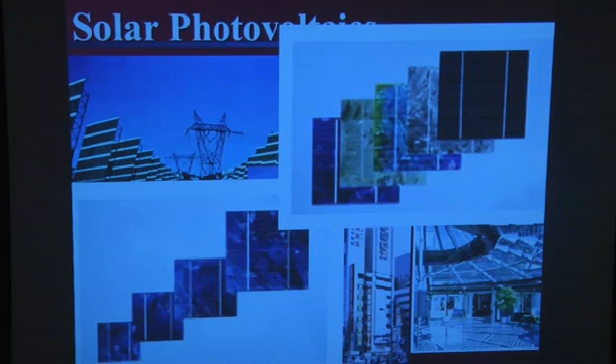but when these architects got involved, then the companies started producing kinds of cells and kinds of panels that could be integrated in buildings in ways that they looked attractive also, which increased the market, and therefore a lot more companies got involved in it. And finally, when Europeans got more involved, especially Germany, by way of feed-in tariff, that increased the market so much that the photovoltaic manufacturing and photovoltaic deployment increased tremendously.

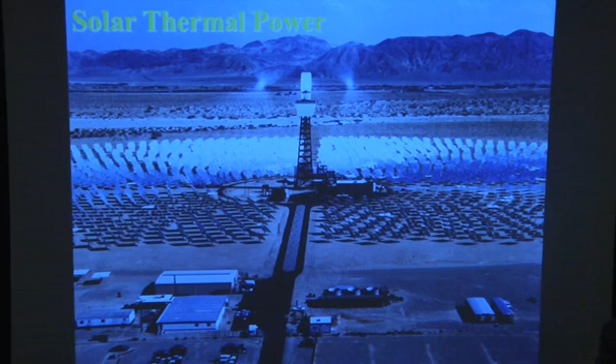Now, that's not the only way we can convert sunlight to electricity. We have another way, which is indirect conversion. That is, you convert sunlight to heat and then heat to power, like in any thermal power plant. So I'm just showing a couple of examples here. This is one which is called the central receiver or power tower type of concept, where reflectors reflect onto a central receiver and you can produce very high temperatures.

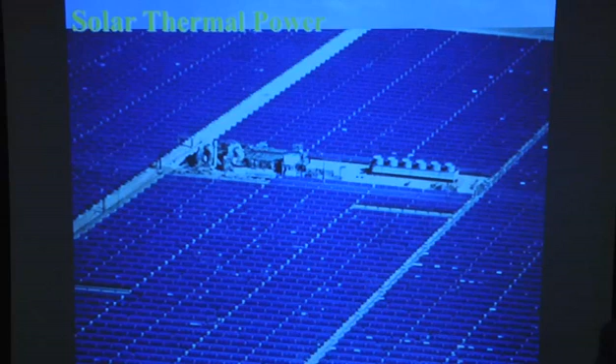Here's another example which has long rows of parabolic troughs, and again you concentrate sunlight on the focal line of the parabolic trough, and you heat a fluid, and then you go through the normal thermal power cycle. Or you can have parabolic dishes. So any of these methods of concentration can be used to convert sunlight to heat at a high temperature, and then go through your thermodynamic power cycles.

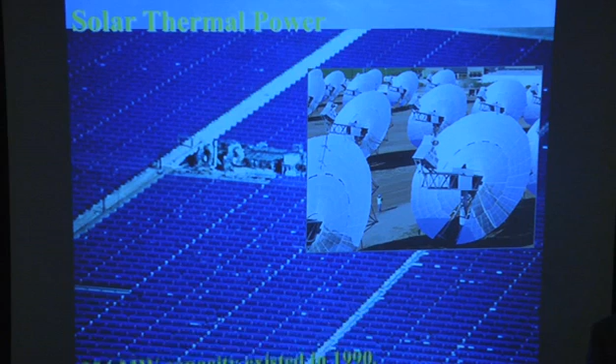As early as 1990, 354 megawatt of this capacity existed in California. By the way, that plant, which was built in stages, and I think the last stage was finished in 1989 or 1990, is still operating. The owner of that plant right now is Florida Power and Light. They happened to buy it, and so they learned from it, and based on that, they built another plant in Florida, and now they're building in Spain and other parts of the world.

However, at that point, the development stopped. If we have time later on, I'll tell you why it stopped, but most recently, there's a resurgence of interest in this technology in Spain, US, India, China, and more than 3,000 megawatts is under construction right now at this point. The main interest comes from electrical utilities, which are interested in large-scale central power plants.

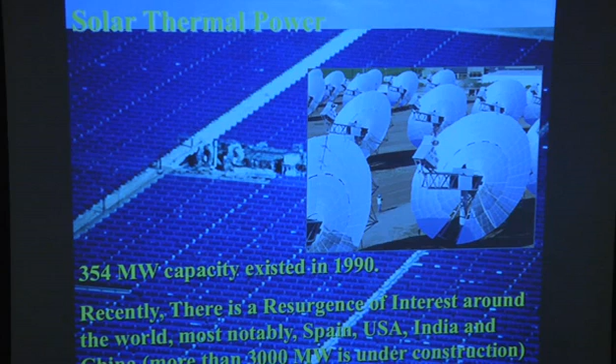And because this is where you can integrate solar power with backup fuels, you can include thermal storage, and that makes it possible for them to have power whenever they need it, so they have more interest in this technology.

Now, photovoltaic costs, in the 70s, it was about $100 a watt. Then came down to about $30 a watt. In 2003, it was down to $3 a watt. I remember that I attended a conference in the late 70s where somebody said that one day photovoltaic panels will cost $1 a watt, and everybody in the audience laughed at that.

But that actually came true in 2010, and right now the cost is less than $1 a watt. In fact, a company that I advise got a bid from a German company at 65 cents a watt, panels delivered to the site where they are going to install those panels. However, these are just the panel costs. The balance of the system adds another couple of dollars to it.

So in these technologies, we're moving in the right direction. The efficiencies are going up, the costs are coming down. However, in photovoltaics, based on the current concepts, we're reaching the limits of cost reduction.

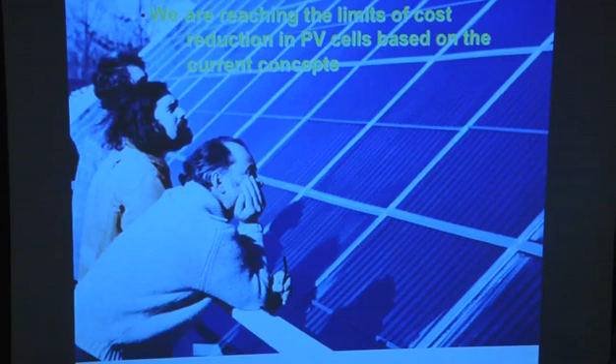Although there are many areas of research, people are looking into materials that are not rare, people are looking into materials that are not toxic, so that solar cells can be made in a sustainable way for a long period of time. But in terms of cost, there's not a whole lot more. There will be some reductions, but not a whole lot. There will be reductions, though, in the balance of the system.

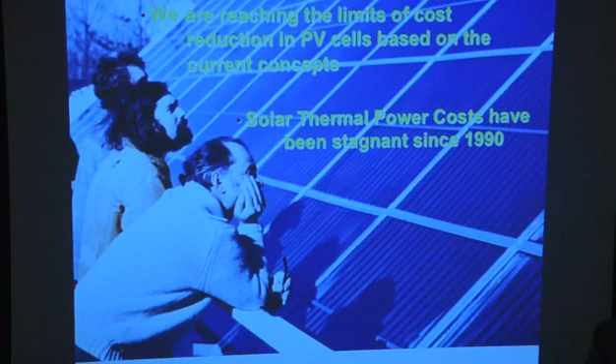Solar thermal power costs have remained pretty much stagnant since 1990. At that time, I heard the cost projection of about $3,500 a kilowatt. Today also, we hear the same cost. And energy storage is sort of missing in all of these cost calculations.

So with this in the background, I thought that I would tell you some new and exciting concepts and developments based on innovations and scientific R&D. Now, they cover a vast area. It's because I picked those three where our group has been working in some way. But at the same time, as I said, at the end of it, if you want to focus on one of them or on something entirely different, we'll be happy to discuss.

So these are examples that I will talk about very briefly. Now, I do want to say that I'm not going to go deep into any of those in my presentation. The reason is that in some of those, a few of you may already be working in it, and you may know a lot, but there are others who may not know anything about it. So I've kept it at a level where people who don't have that background can still understand it.

So first, beyond photovoltaics, new concepts in direct energy conversion. Then new concepts in solar thermal power. And finally, I thought I'd put one in environmental application of solar energy, which is photocatalytic oxidation for disinfection and environmental cleanup.

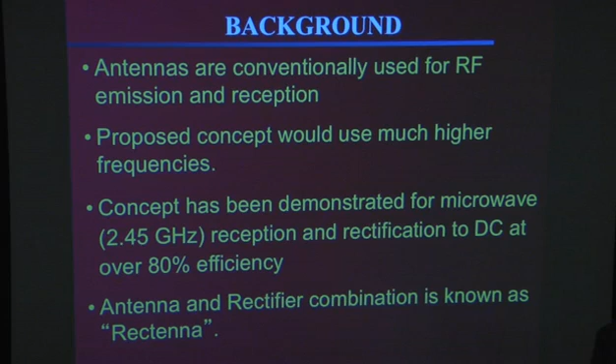So here's the problem: FM broadcast wavelength is in meters. Therefore, your antenna size is in meters. And for UV-visible, the wavelength is in microns, nanoscale or microscale. So your antenna size has to be that small. And in fact, the rectifier size becomes even smaller. And so that's where the holdup is.

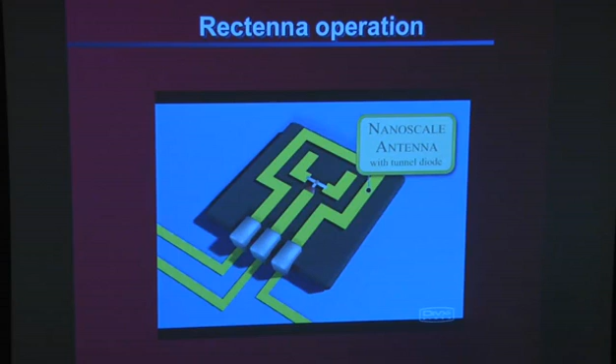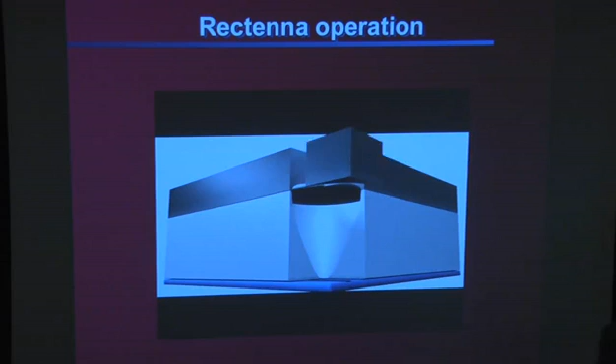Okay. So here is a concept that we are following, where we would absorb sunlight and re-emit it in the infrared. And that would use plasmonic emitters. So here you would have the plasmonic emitters, because then we can see what frequency or what wavelength we need. So we have emission, and we have the antenna and diode designed for that frequency.

So with that concept, if we can convert far infrared to electricity, and we can show that this concept works, then we can continue to work at higher and higher frequencies. So that's the whole idea.

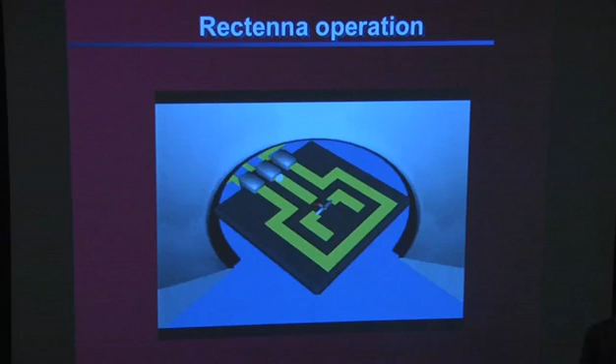Now, as far as making antennas of that size, as I told you, with nanotechnologies it's not a big problem. In fact, a group at Idaho National Engineering Lab and a company they were working with in Boston did a press conference where they showed a flexible substrate on which they had printed millions of these antennas. But they also agreed with me when I called them that the problem is really not the antenna, the problem is the diode, because each antenna has to be integrated with a diode.

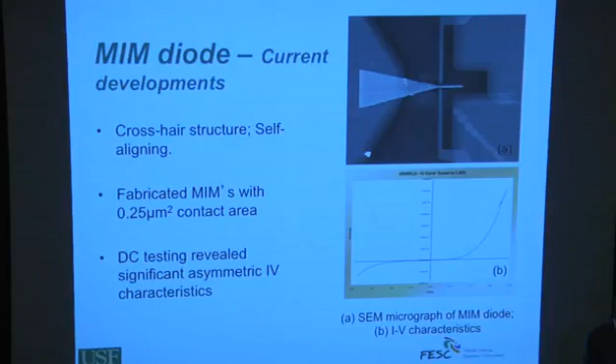So the diode concepts that work at lower frequencies would not work at frequencies that high. So you have to go to other concepts. We started looking into MIM diodes and found some success, although the characteristics are asymmetric, but it's not that good a rectification. Then we started looking into polymer-based rectification, where we can use self-assembled monolayers for the insulator layer of MIM diodes. And we found a peak rectification ratio of 150 to 200. So that gives us some hope that we are moving in the right direction. Okay.

Ultimately, though, what I foresee is that you will have biological antennas and biological diodes. Okay. The advantage in this concept, although it still needs to be shown that we have converted at a certain efficiency from infrared or from visible light, even though it's been shown in the radio frequency range, is that the biological would be based on work that has already gone on in terms of single-cell algae that people are working on. Eventually, that's where the development will go.

So if you can do that, then you could do ambient radiation. In other words, it will not be just the visible light during the daytime, but radiation at any other time also that could be converted, and you could then start foreseeing buildings covered with these biologically grown antennas that are converting ambient radiation to electricity at all times. Okay. So that's one of the concepts.

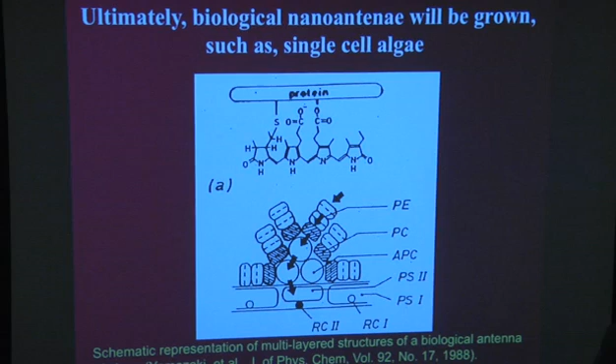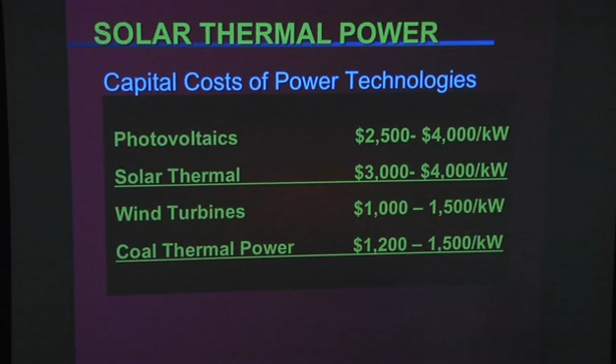Now, another thing I said was solar thermal power. And here's the problem with solar thermal power: when you look at the costs, solar thermal power costs are more than 2 times the cost for coal power, and coal is the biggest source for generating power in the world right now. Okay. We can talk all about environmental benefits, why solar power should be preferred even though it's more expensive, but we also know that in practice that will not happen. So we will have to reduce the capital costs of solar thermal power by at least 50%.

And so the question is, what do we expect to see in the future, or what should we do that will reduce these costs? I co-founded a small startup company, and they're building a demonstration 1 megawatt power plant where they have shown that they can already reduce the cost from $3,000 a kilowatt to $2,000 a kilowatt. But that's not enough. We need to reduce it even more.

So there I see the future developments that we need to work on include new thermodynamic cycles, improving the efficiency of conversion in thermodynamic cycles. This is important because in thermal power, we have been working with thermodynamic cycles like the Rankine cycle that were developed more than 100 years ago.

And to say that they had thought of everything 100 years ago and we can't make any improvement on that, I just don't buy that. So we can look at thermodynamic cycles, and the kinds of things that I see us working on would be the cascading cycles, which, by the way, we are already doing in combined cycle. We have a Brayton cycle and then a bottoming Rankine cycle. But you could have a number of cascading cycles.

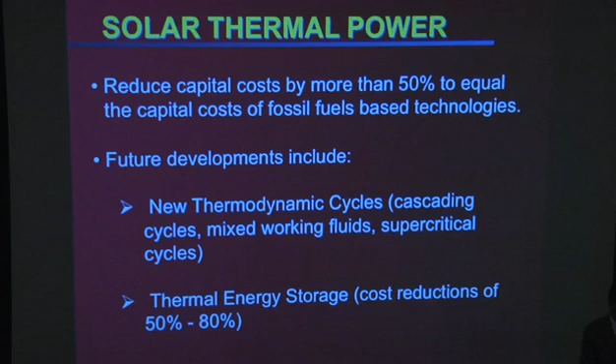In addition, and this is important for solar thermal power, thermal energy storage can be implemented even now, and it's being implemented in the plants that are being built in Spain. But we can reduce the cost of thermal energy storage by as much as 50 to 80%. Okay? So I'll talk a little more about that later on. But right now, let me tell you this.

All of the thermal power plants and all of the solar thermal power plants are based on pure working fluids or single working fluids. The problem with a single working fluid is that that fluid boils at a constant temperature when the pressure is constant. And it gives us what we call a pinch point problem. That is, because the temperature of the fluid that is being heated is less than the temperature of the fluid that's giving the heat to it, you cannot violate that condition.

That means that there is heat left in the heat source fluid that you cannot utilize, and you cannot heat the fluid that you're heating to the temperature that you could. If you could heat a fluid, let's say in this line, you can go to much higher temperature, therefore utilize your heat source much better.

Okay. That's something that we did not need to think about before, but now it makes a lot of sense, because we have to see in the thermodynamic cycles, can we improve the efficiency by 5%? Well, forget about 5. Can we improve the efficiency by 1%? Because when you're building a 100 megawatt power plant, 1% improvement in efficiency in terms of money is a big improvement.

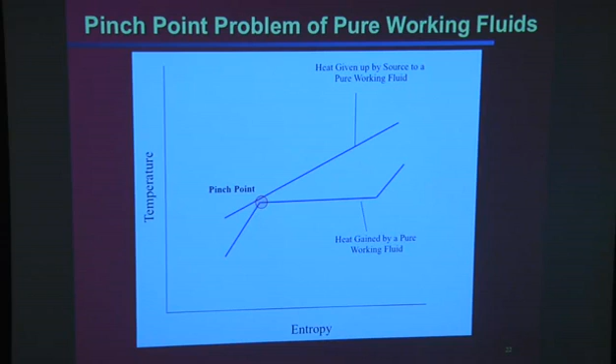Okay. So we need to look at everything there, and this is one of the ideas where the question is, how can we do that? Well, we can do it by multi-pressure boiling, we can do it by supercritical boiling, and we can do it by multi-component mixtures. Okay. So we started looking at multi-component mixtures, and now we're looking at supercritical boiling.

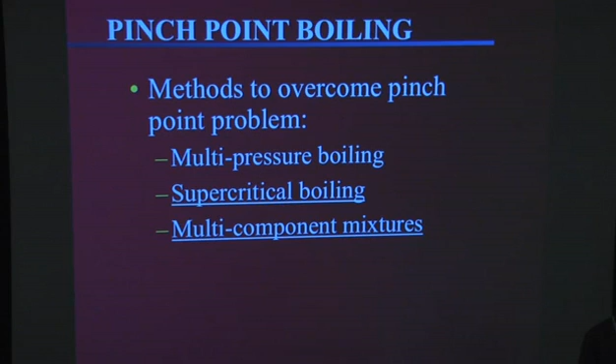In terms of multi-component mixtures, these are some examples. You could use mixed hydrocarbons such as isobutane, pentane, hexane. This is for lower temperature power cycles. You could use ammonia water, and there was a cycle that was proposed by Alexander Kalina, which is called the Kalina cycle, that's based on ammonia water mixture.

Because when you mix the fluid, as the fluid boils, the temperature doesn't remain constant. The composition of the fluid changes, therefore its boiling temperature changes, and you utilize your source much better. Same thing in condensation. When you condense, the composition changes as one component starts condensing, therefore the temperature changes, and you utilize the heat sink much better than you would otherwise.

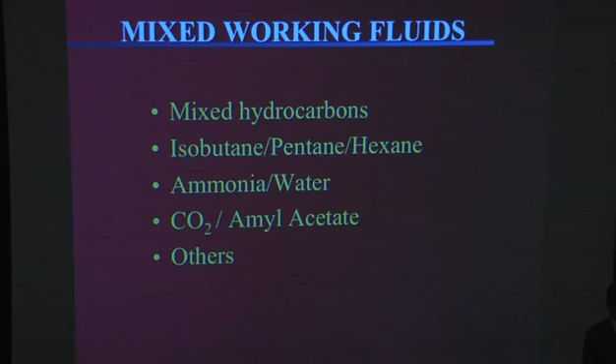Okay. So we followed this process of multi-component mixtures and actually came up with a new cycle. And this cycle, in the literature, is named after me. It's the Goswami combined power cooling cycle. In this, you would boil that multi-component mixture, and you would get mostly one component. We started with ammonia water in this case, so I'll give you that as an example. But the cycle is now extended to a number of other fluids.

So when you're boiling a mixture of ammonia and water, ammonia will boil first. And therefore, what you have here in the superheater is mostly ammonia, a very small amount of water. And so now you expand that in the turbine and you produce power. The rest of the water that did not boil off now comes back, and you can remove some of the heat from it, and then it gets mixed with ammonia. Ammonia can be condensed by absorption in water.

So it removes a constraint from ammonia, and that constraint is normally when you bring this fluid out of the turbine, its temperature has to be above ambient so that you can transfer heat to the ambient, whether it's ambient water or ambient air. Now, because we can condense ammonia by absorbing in water, you don't have that constraint. That means you can expand ammonia in the turbine to much lower pressures, therefore much lower temperatures. So you could get ammonia out at a temperature as low as 0 degrees.

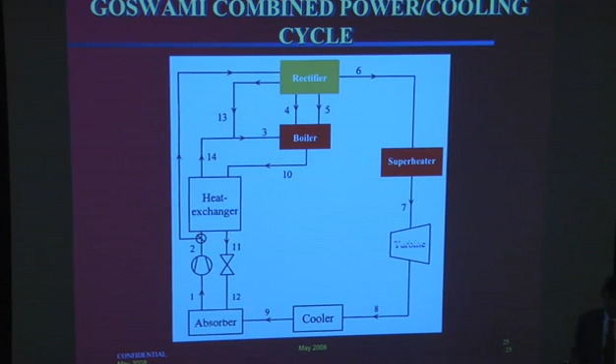So now you can first remove some refrigeration from that ammonia and then bring it to the absorber where you condense it. Now, we're not violating any thermodynamic laws there, because you still have to transfer heat to the ambient. And you can only transfer heat from higher temperature to lower temperature. So what happens when you absorb ammonia in water, ammonia condenses, gives up its heat of condensation, and this temperature goes above ambient. That's when you transfer the heat. And so this way, this cycle works.

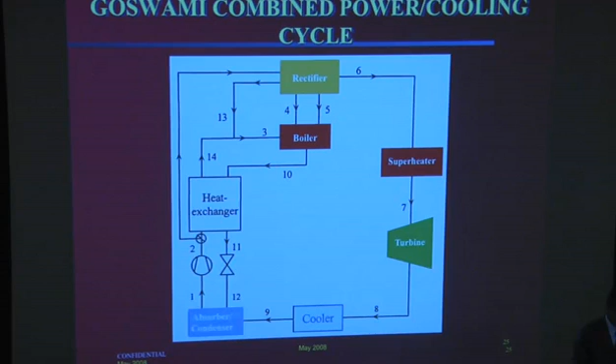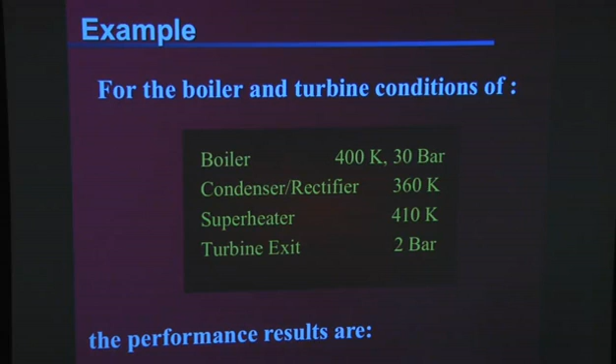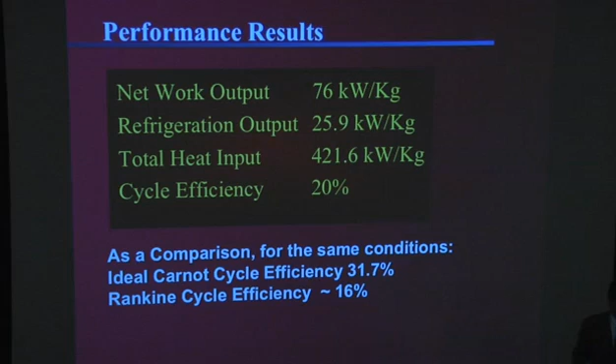So we have improved almost 25% over the Rankine cycle efficiency, but we have also produced refrigeration in addition to power. Now, at some places you may not need refrigeration, but the cycle can be tweaked to produce all power, all refrigeration, or a mixture of power and refrigeration. So that's why it's called the combined power and cooling cycle.

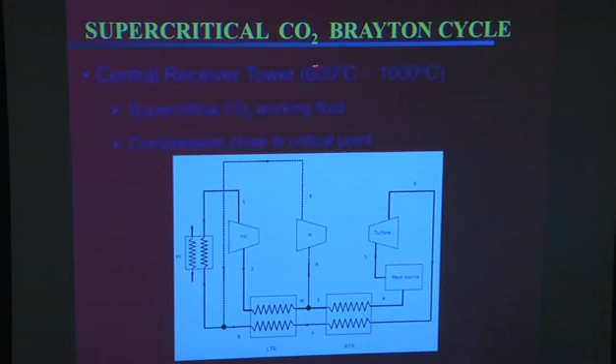More recently, we are looking into much higher temperatures. The reason is that as far as solar thermal power is concerned, we're all moving towards higher temperatures. As you know, as you go to higher temperatures, the Carnot efficiency is higher. And therefore, if you can improve the efficiency of conversion without increasing the cost much, you reduce the cost. So let's say that you can go to a temperature of 1000 degrees C. That presents a problem as to what working fluids you will use at that temperature, or even lower, maybe 800 degrees C. So supercritical CO2 is one of those fluids that can be used.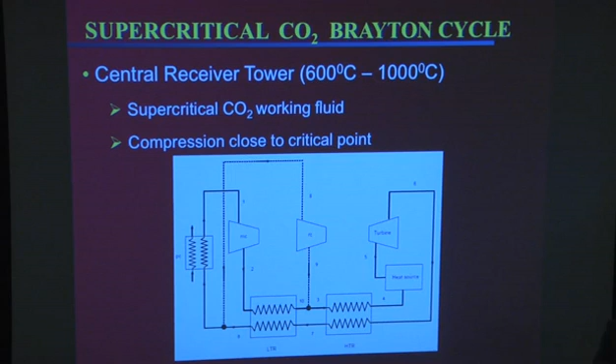And in this case, the only thing is that to condense CO2 in a normal thermodynamic cycle, if it's using steam, for example, then you would condense steam to water. In this case, the critical temperature of CO2 is very low. So only in very cold climates will you be able to condense it. But if you bring it close to the critical point, at that point the density is extremely high. And therefore, it's not like compressing liquid, but it's not far from that either. And therefore, this cycle can give you very high efficiencies.

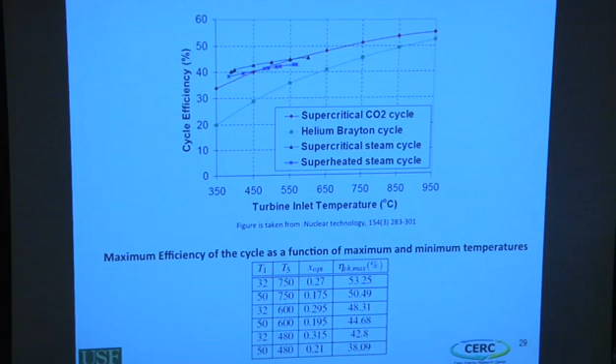In fact, for a temperature of about 750 or 800 degrees C, the efficiency is more than 50%. So compare that with the present solar thermal power plants, which are using a steam cycle with an efficiency of somewhere between 30 to 35%. This is a major improvement, and therefore the additional cost reduction that we need will come just from that. Now, that's about the thermodynamic cycles.

About the storage in solar thermal power plants: now, some people think there's a competition between photovoltaics and solar thermal power. I don't think there's a competition. There are niche markets for photovoltaics, there are niche markets for solar thermal power. In large-scale power, you want to ensure that this power plant doesn't operate just during daylight hours, that it operates in non-solar hours also. And you want to ensure that you can provide power at all times, at least all times when it's needed. So that means if you need to use a backup fuel, that you can use that. And both of these can be done in solar thermal power.

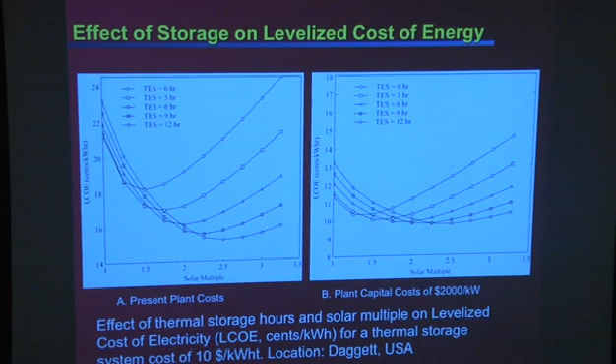Now, I talked about this two-tank storage. You can actually use a single tank also, as long as you can maintain the thermal stratification within the tank. That means the top side of the tank remains hot and the bottom remains cold. That is, you don't allow the thermal storage medium to mix. So there are ways to do that, and I will just give you one example of how we are doing that.

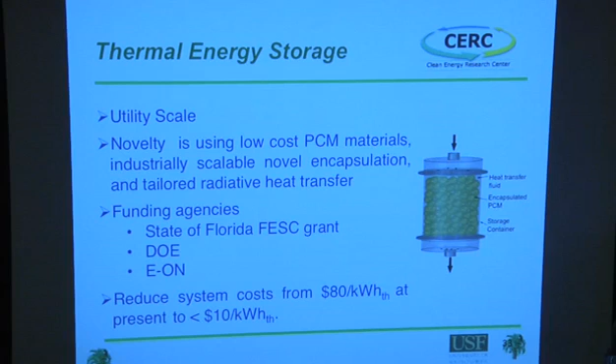We decided to use phase change materials and make spherical capsules out of phase change materials, and the same tank that would be used for oil storage or molten salt storage would just have these capsules dumped in there. Now these capsules remain in place, therefore you maintain your thermal stratification. So you need only one tank, and we expect that we will be able to reduce the system cost from $80 that's being quoted in Europe to less than $10 a kilowatt hour thermal. And so with the two developments of thermal storage and the thermodynamic cycles, I think we can then compete at large scale with the conventional power.

So here I just wanted to show a few examples of what we have done with these capsules. The phase change material we use is salt, and salts are very cheap. In this case, up to about 300 degrees C, we're just encapsulating them in a polymer. When we go to higher temperatures, we add a layer of metal on top of it.

And actually these capsules, because this was under the Department of Energy program, our goal in the first phase was to make sure that these capsules go for hundreds of thermal cycles, heating and cooling, without any degradation in the performance. They've actually gone through 500 thermal cycles. Our objective is to take them to 10,000 cycles, which is what they would expect to see in their normal life.

Then we went to higher temperatures, and the encapsulation material is ceramic at that point. And this is actually sodium silicate. After taking it through cycles, we actually cut it to see what happens inside. We just wanted to be sure that the salt is not diffusing through the first layer into the encapsulation material.

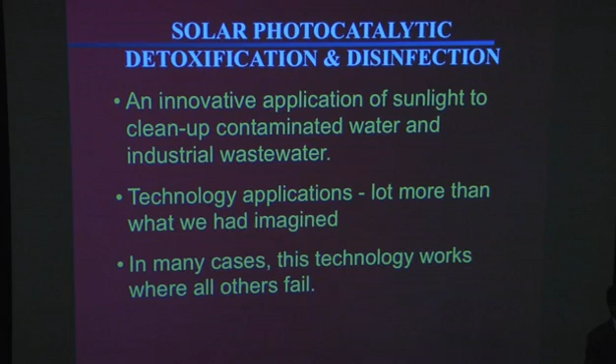So it started as an innovative application of sunlight to clean up contaminated water and industrial wastewater. And as we developed the technology, we found applications that were much beyond what we had originally imagined. And in many cases, this technology works where all others fail. The next is just a news clip that explains in layman's terms what this technology is.

It's a matter of chemistry that's well known to anyone who does laundry. If you leave colored fabrics out in the sun for too long, they're color faded. That's because the ultraviolet part of the sunlight has acted on that color molecule and breaks it up. Engineers at the University of Florida have been applying this principle to the process of cleaning up groundwater that's been contaminated with organic chemicals like dioxin or PCBs.

We put a catalyst in water and expose it to the sunlight, that is the ultraviolet part of the sunlight. As the ultraviolet photons are absorbed, they cause a chemical reaction which breaks up chemical bonds. The catalyst is titanium oxide, an ingredient in white toothpaste and other products. It's used as a pigment in paints, it's used as a food additive and in a number of things that we use. And it's available abundantly. It's probably the second most abundant material available in the world after salt.

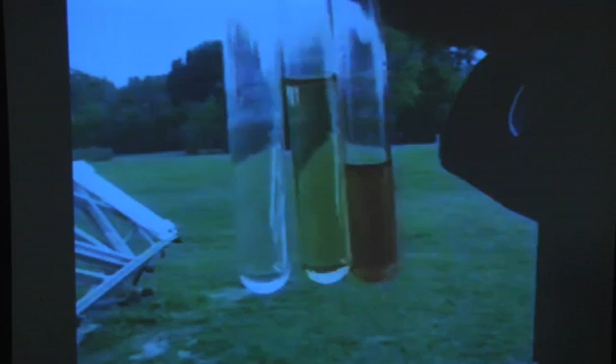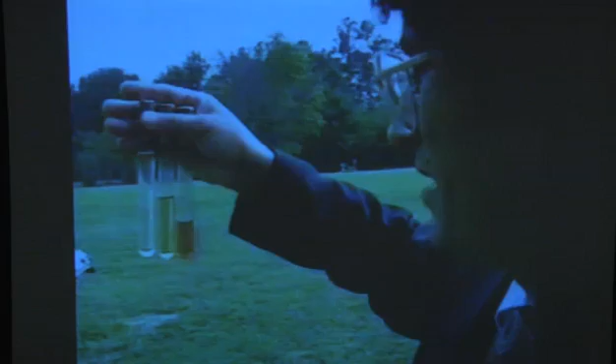And it successfully cleaned up water in the lab. The darkest color is the water we put in the reactor, then we got the next color as it went through, and finally this color is... Over at a base in western Florida, Professor Goswami's graduate students have taken the process from the lab to test it in an actual cleanup site.

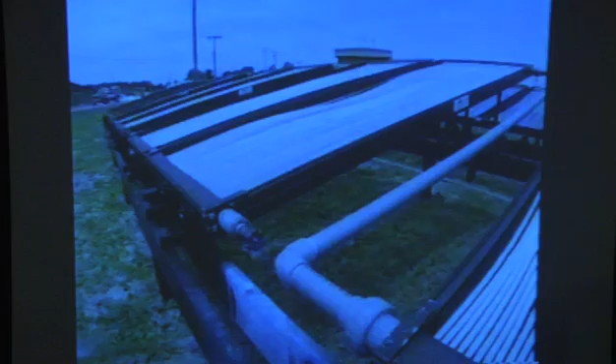The site was previously used for what they call POL, a petroleum oil lubricant storage area. Over the years, leaks from tanks and spills during fuel transfers have resulted in contamination of the groundwater. It's an ideal area to put the process to the test. Groundwater mixed with titanium oxide is pumped through narrow tubes in the solar reactor. The goal is complete destruction, taking the hydrocarbons down to carbon dioxide and water.

Obviously the solar aspect is not going to be applicable everywhere. If you go up to Maine, it's going to be hard to run a solar powered unit year-round. For now, testing continues in the Sunshine State. Scott Gable, CNN, Future Watch.

So that gives a layman's explanation. And of course, we continued to work on it and found that we could not only clean up groundwater, but industrial wastewater from pharmaceutical companies. And then we got into disinfection of water and finally disinfection of indoor air.

It turned out that the application really did not become commercial as we thought it would. The main reason was that cleaning up industrial wastewater or cleaning up contaminated groundwater was all based on regulation. If the regulation did not require somebody to clean up, they did not need to.

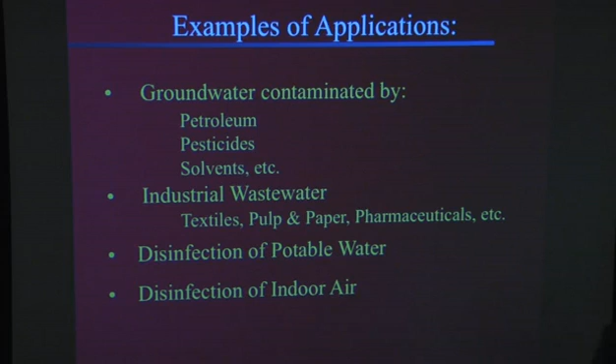But on the other hand, when we applied this to disinfection of air, this process became commercial faster than we wanted to. That was because it wasn't based on regulation, it was based on real need of people. And so you again watch a news clip here.

600 people used to work in the Central Florida courthouse, but now the doors are closed, the hall is empty, and these are the only workers allowed inside. The Polk County Courthouse is a sick building. There were also problems with the air conditioning, that it wouldn't properly dehumidify the air, and humidity was way too high, and that caused mold.

Bacteria buildup and poor ventilation are typical in sick buildings. Some of the workers here developed health problems ranging from runny noses to permanent crippling lung conditions. The entire building was shut down. Everything inside is being replaced. The cost to taxpayers, $37 million.

The hard part for the citizens of Polk County, however, is they are paying for it twice in a way, and that's very unfortunate. The money to fix this building is already spent. But a University of Florida professor has a new solution that could save millions in the future. An air filter coated with a common chemical is used with ultraviolet light and installed in an air duct. The system kills most bacteria as the air filters through the trap. Researchers say it would cost a fraction of what it would now take to fix the thousands of sick buildings across the country. Instead of replacing the whole duct system, you simply replace the filter system, which will be much cheaper than replacing the system. So the new process comes too late for this courthouse. Now these are the judges who will rule on when workers can return. In Polk County, I'm Karen Brunel reporting.

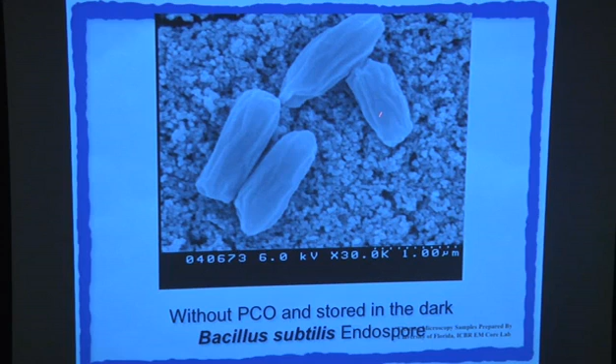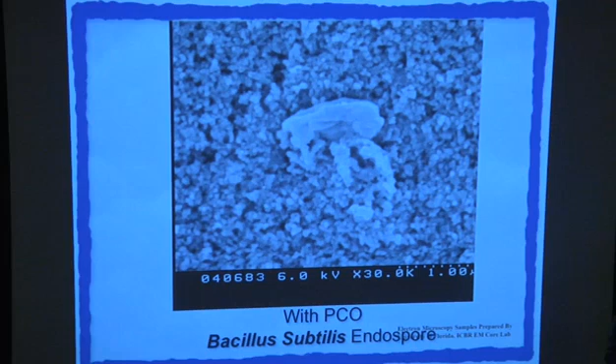Then we found that this technology can actually be used as a defense against bioterrorism. What you see is Bacillus subtilis, which is sort of a close cousin of Bacillus anthracis, which is anthrax. And with the photocatalytic technology, this is how it looks before you shine the light on it, and after you shine the light, as you see, it is literally evaporating, being converted to carbon dioxide and water, so that it can be used for defense against bioterrorism.